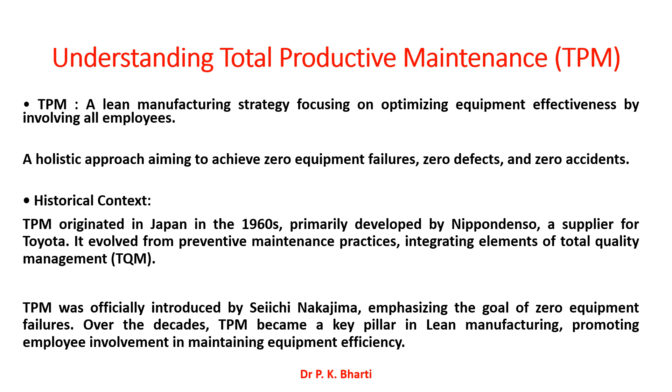The historical context of total productive maintenance is that it originated in Japan in the 1960s. It was primarily developed by Nippondenso, a supplier for Toyota, and it evolved from preventive maintenance practices, integrating elements of total quality management. TPM was officially introduced by Seiichi Nakajima, emphasizing the goal of zero equipment failures. Over the decades, TPM became a key pillar in lean manufacturing, promoting employee involvement in maintaining equipment efficiency.

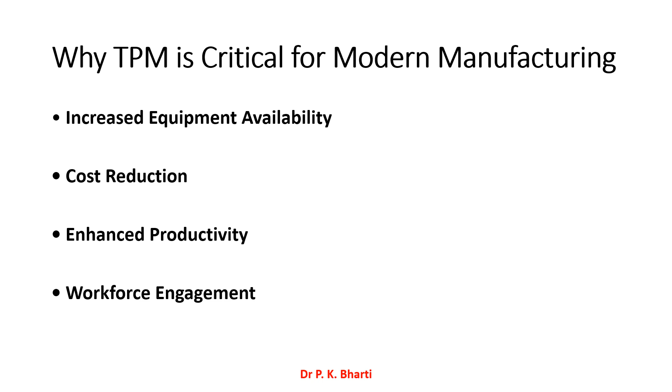There are four reasons why total productive maintenance is critical for modern manufacturing. First, it increases equipment availability. Second, it reduces the cost of maintenance. Third, it enhances productivity. And fourth, it improves workforce engagement. There are four core goals of total productive maintenance. First, zero breakdowns. Second, zero defects. Third, zero accidents. And fourth is maximizing overall equipment effectiveness.

Here we will also see what overall equipment effectiveness is. It is a key performance metric in total productive maintenance used to measure the productivity of equipment. Overall equipment effectiveness is calculated by combining three factors: availability, performance, and quality. OEE helps identify areas for improvement by showing how much production time is truly productive. A perfect OEE score of 100% means the equipment is producing high quality goods at maximum speed with zero downtime.

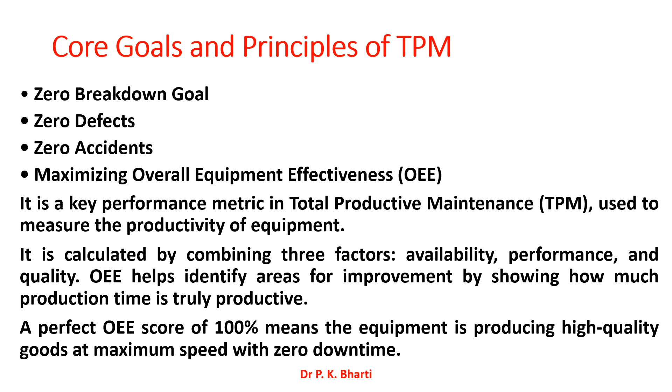There are 8 fundamental pillars of TPM implementation. First, autonomous maintenance. Second, planned maintenance. Third, focused improvement. Fourth, quality maintenance. Fifth, early equipment management. Sixth, training and education. Seventh, safety, health and environment. And eighth, office TPM.

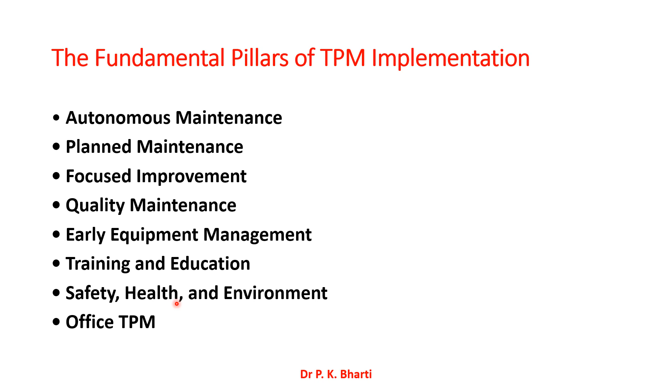Now in the coming slides, I will be discussing the pillars of total productive maintenance one by one. The first pillar is autonomous maintenance, also called Jishu Hozen. It is operator-led maintenance. It is a core principle of total productive maintenance where the machine operator takes responsibility for routine maintenance tasks. This practice empowers operators to perform activities like cleaning, inspection, lubrication, and minor adjustment.

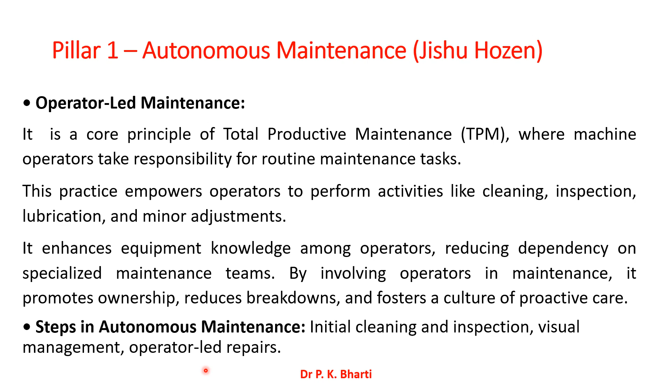It enhances equipment knowledge among operators, reducing dependency on specialized maintenance teams. By involving operators in maintenance, it promotes ownership, reduces breakdowns, and fosters a culture of proactive care. Steps in autonomous maintenance involve initial cleaning and inspection, visual management, and operator-led repairs.

The second pillar of total productive maintenance implementation is planned maintenance. It consists of three types of maintenance plans. The first one is preventive maintenance. It involves regular scheduled maintenance activities to prevent equipment failures before they occur. It focuses on tasks like inspection, cleaning, lubrication, and replacing worn parts at predetermined intervals. This approach helps in reducing unplanned downtime and extending the life of equipment.

Predictive maintenance uses data and condition monitoring tools to predict equipment failures before they happen. It involves technologies like vibration analysis, thermal imaging, and sensors to detect abnormalities in equipment performance. By relying on real-time data, predictive maintenance enables timely interventions, reducing unplanned downtime. This method is more efficient than preventive maintenance as it targets specific issues based on actual equipment conditions rather than time-based schedules.

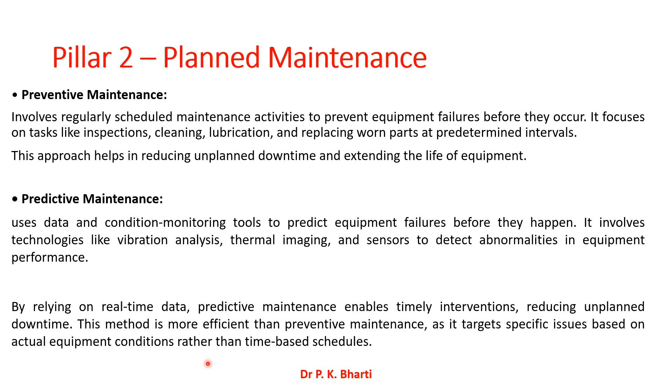The third plan in planned maintenance is condition-based monitoring. In the total productive maintenance context, it involves continuously or periodically monitoring the actual condition of equipment to determine maintenance needs. It relies on sensors and diagnostic tools to track key parameters like temperature, vibration, and pressure. CBM, that is condition-based monitoring, helps identify early signs of wear or malfunction, allowing maintenance to be performed only when necessary. This approach optimizes maintenance schedules, reduces unnecessary interventions, and helps prevent unexpected equipment failures.

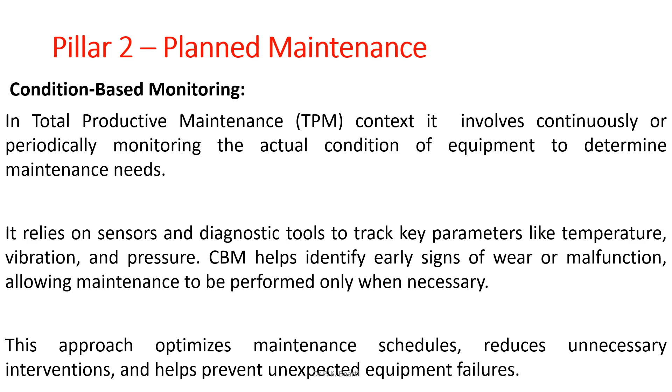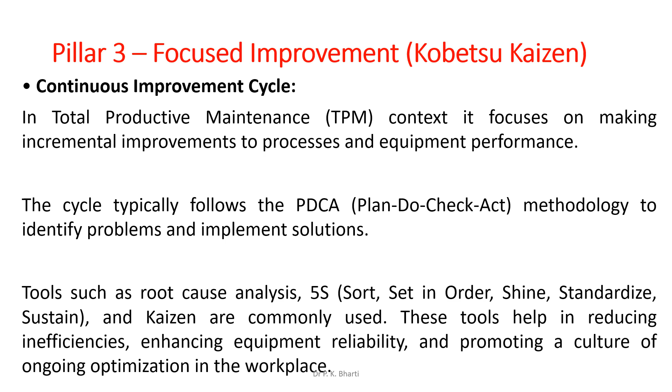Pillar 3, Focused Improvement or Kaizen. The first approach is the continuous improvement cycle. In the total productive maintenance context, it focuses on making incremental improvements to processes and equipment performance. The cycle typically follows the PDCA, Plan Do Check Act, methodology to identify problems and implement solutions. Tools such as root cause analysis, 5S, and Kaizen are commonly used. These tools help in reducing inefficiencies, enhancing equipment reliability, and promoting a culture of ongoing optimization in the workplace. The third pillar in total productive maintenance is focused improvement or Kaizen.

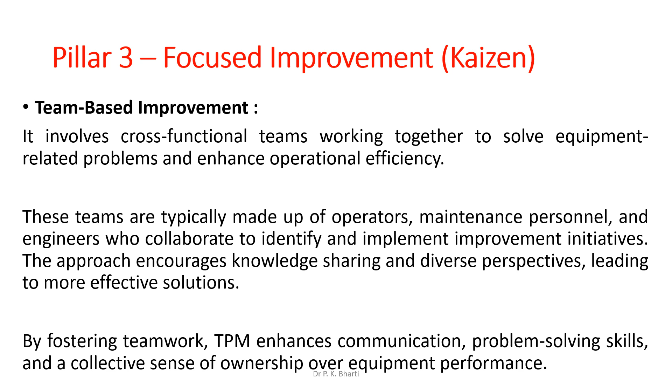Focused improvement consists of team-based improvement, which involves cross-functional teams working together to solve equipment-related problems and enhance operational efficiency. These teams are typically made up of operators, maintenance personnel, and engineers who collaborate to identify and implement improvement initiatives. The approach encourages knowledge sharing and diverse perspectives, leading to more effective solutions. By fostering teamwork, TPM enhances communication, problem-solving skills, and a collective sense of ownership over equipment performance.

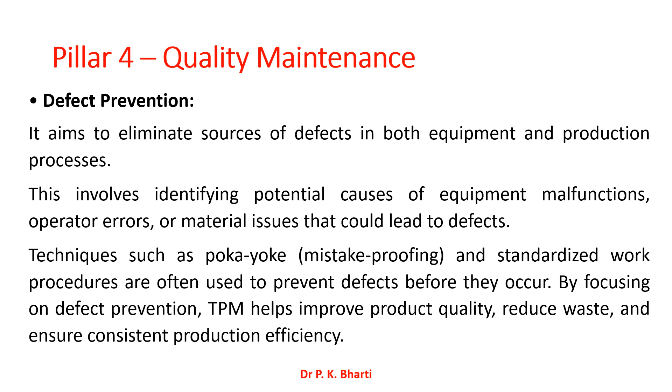Fourth pillar in total productive maintenance is quality maintenance. Quality maintenance means to eliminate sources of defect in both equipment and production processes. This involves identifying potential causes of equipment malfunctions, operator errors, or material issues that could lead to defects. Techniques such as poka-yoke and standardized work procedures are often used to prevent defects before they occur. By focusing on defect prevention, TPM helps improve product quality, reduce waste, and ensure consistent production efficiency.

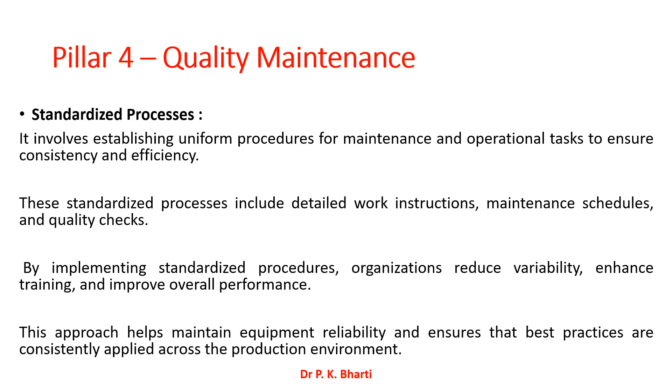As we have discussed, quality maintenance involves standardized work procedures. It involves establishing uniform procedures for maintenance and operational tasks to ensure consistency and efficiency. These standardized processes include detailed work instructions, maintenance schedules, and quality checks. By implementing standardized procedures, organizations reduce variability, enhance training, and improve overall performance. This approach helps maintain equipment reliability and ensures that best practices are consistently applied across the production environment.

Fifth pillar in TPM implementation is early equipment management. It involves techniques like design for maintainability. Design for maintainability in total productive maintenance focuses on designing equipment and systems to be easily maintained and serviced. This includes features such as modular components, accessible maintenance points, and clear diagnostic tools. By incorporating maintainability into the design phase, the goal is to reduce downtime, simplify repair procedures, and enhance overall equipment longevity. This proactive approach ensures that maintenance tasks can be performed efficiently, minimizing disruption to production and improving overall operational reliability.

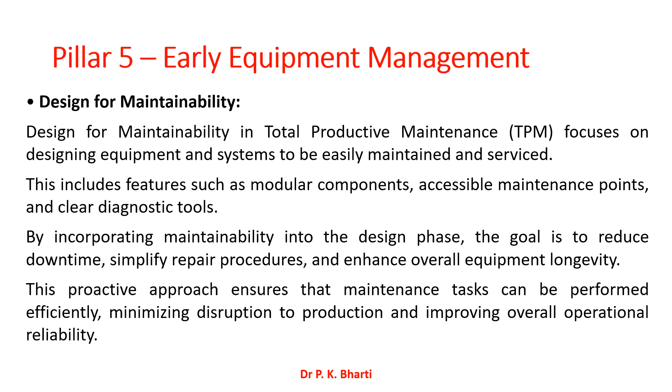The second technique in early equipment management is lessons from existing equipment. Lessons from existing equipment in total productive maintenance involve analyzing the performance and maintenance history of current equipment to guide future practices. This includes reviewing past failures, maintenance records, and performance data to identify recurring issues and effective solutions. By learning from existing equipment, organizations can implement improvements in design, maintenance strategies, and operational procedures. This approach helps avoid past mistakes, optimize maintenance schedules, and enhance overall equipment reliability and performance.

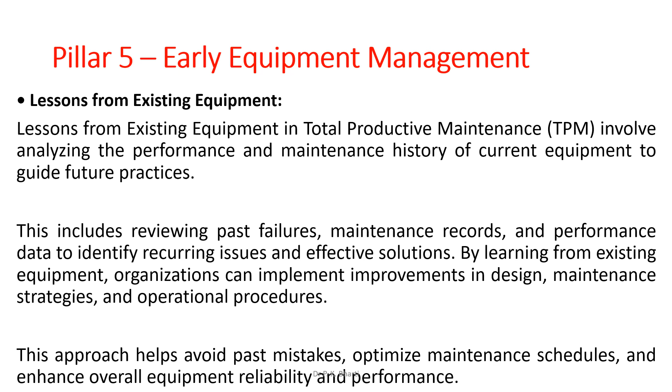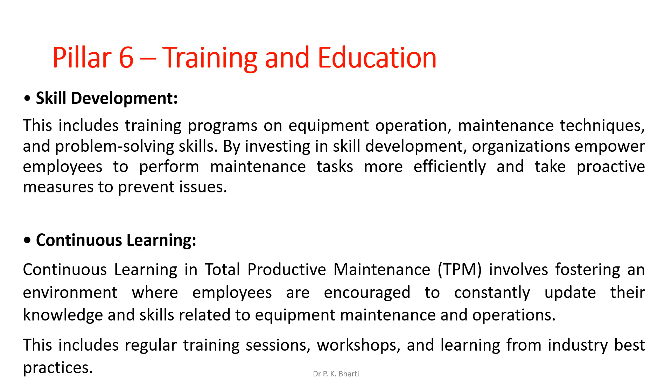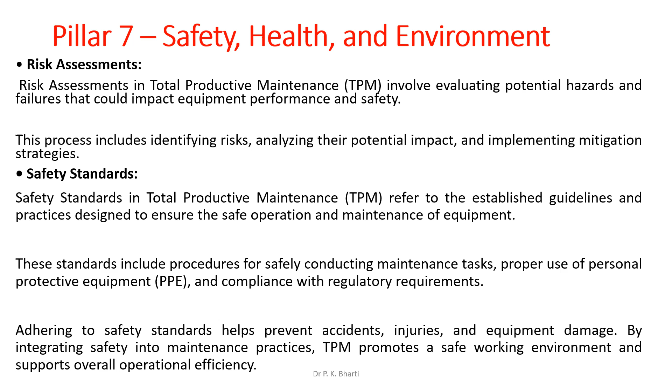The last but a very important pillar of the total productive maintenance implementation is Office TPM. Office TPM extends the principles of total productive maintenance to administrative and office environments. Office TPM focuses on improving the efficiency and effectiveness of office processes such as document management, workflow optimization, and employee productivity.

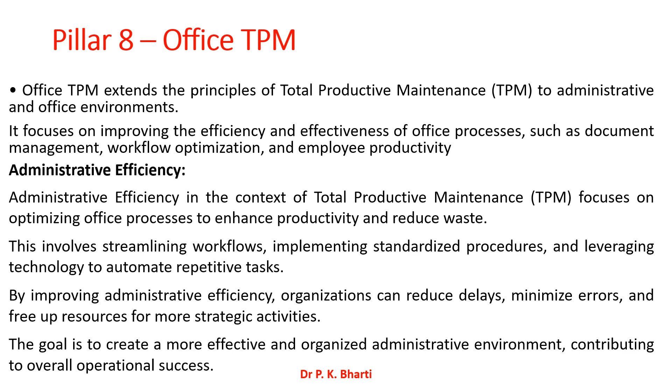Administrative efficiency in the context of total productive maintenance focuses on optimizing office processes to enhance productivity and reduce waste. This involves streamlining workflows, implementing standardized procedures, and leveraging technology to automate repetitive tasks. By improving administrative efficiency, organizations can reduce delays, minimize errors, and free up resources for more strategic activities. The goal of Office TPM or administrative efficiency management is to create a more effective and organized administrative environment, contributing to overall operational success.

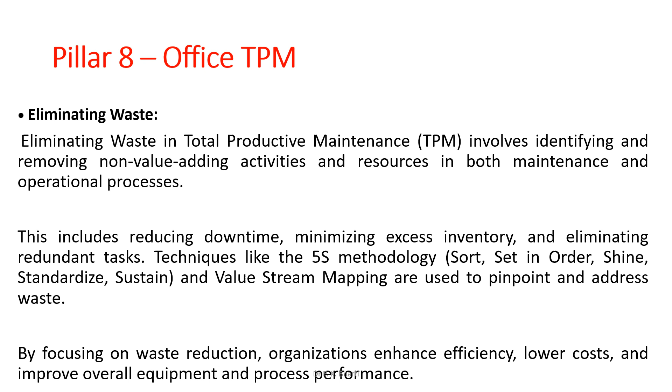Office TPM also focuses on eliminating waste. Eliminating waste in total productive maintenance involves identifying and removing non-value adding activities and resources in both maintenance and operational processes. This includes reducing downtime, minimizing excess inventory, and eliminating redundant tasks. Techniques like the 5S methodology and value stream mapping are used to pinpoint and address waste. By focusing on waste reduction, organizations enhance efficiency, lower costs, and improve overall equipment and process performance.